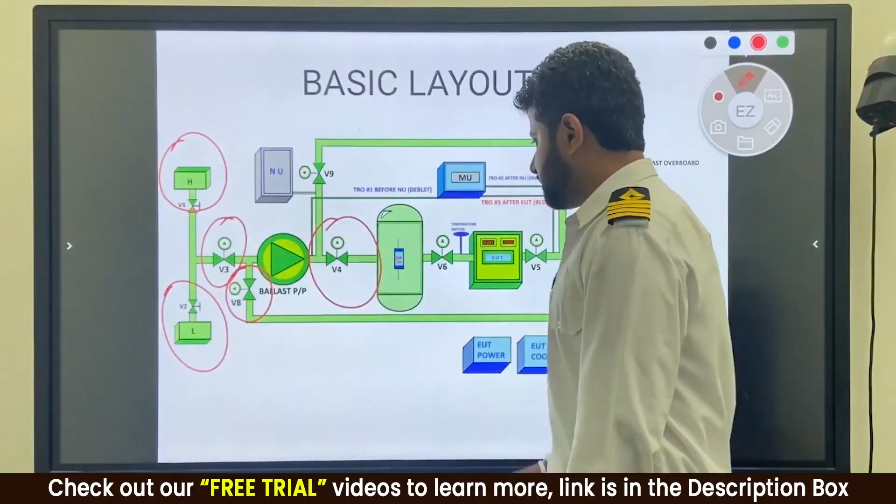So this is your high sea chest and low sea chest, copied from where the pump is taking suction. These are your three valves: V3, V8, V4. Can you see these valves? These are all pneumatically operated valves.

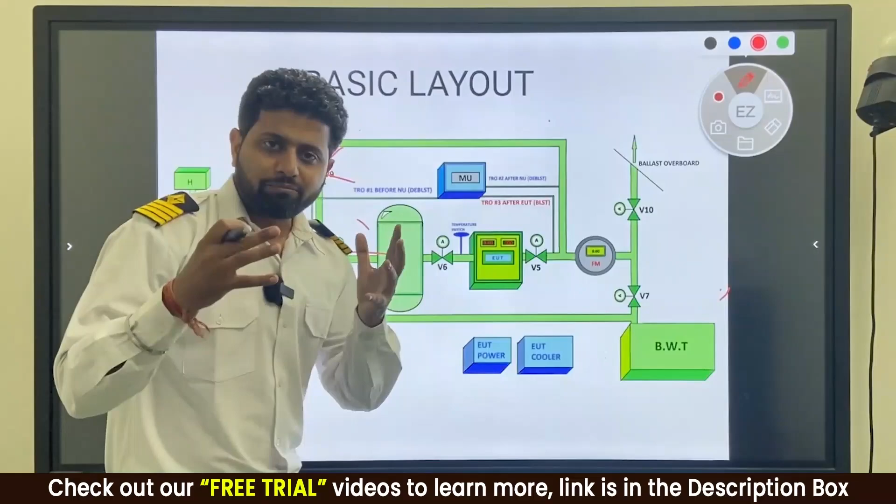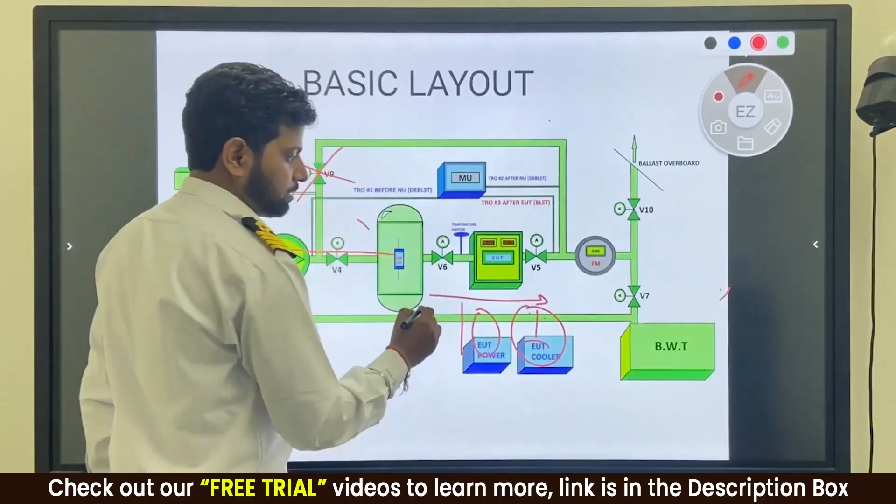Okay, let's move ahead. Now let me show you what this monitoring unit is and how it works. So what happens is, through this ballast pump, microorganisms are trying to go into the ballast water treatment system, right?

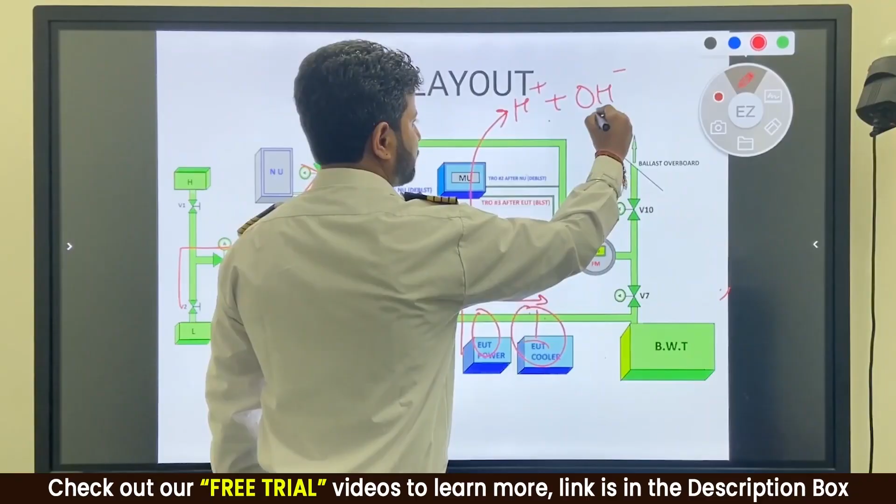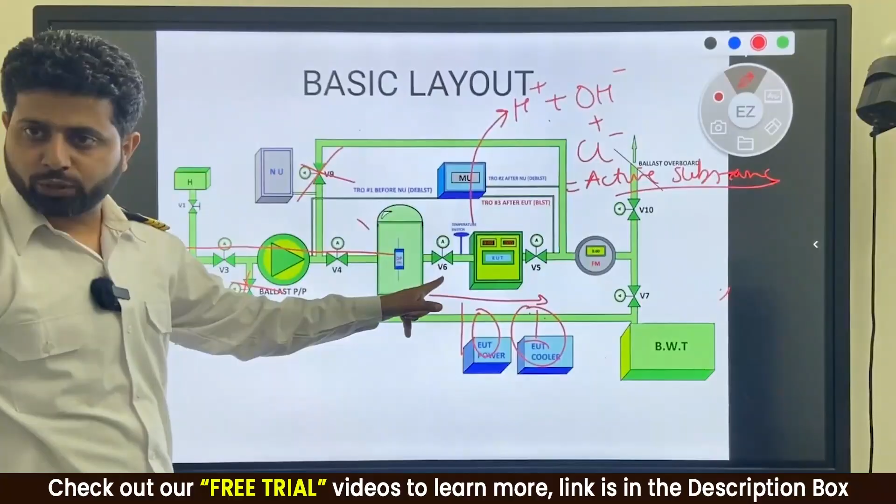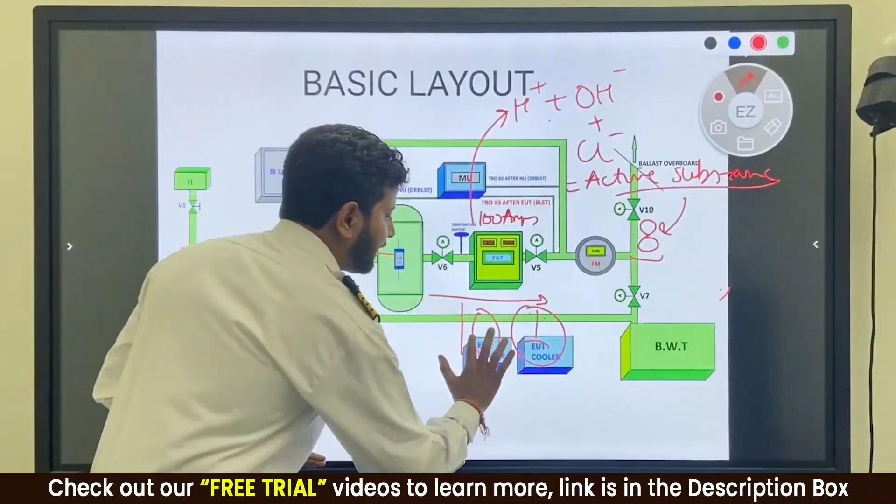Say the current flowing is 100 amps, and because of this current, say 8 active substances are formed. Then these 8 active substances kill 8 organisms over here. That means 2 are still remaining and they go into the tank.

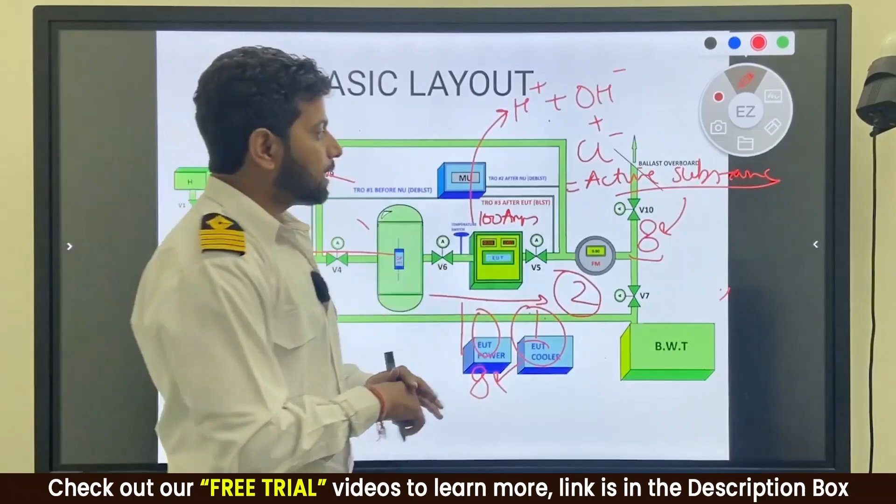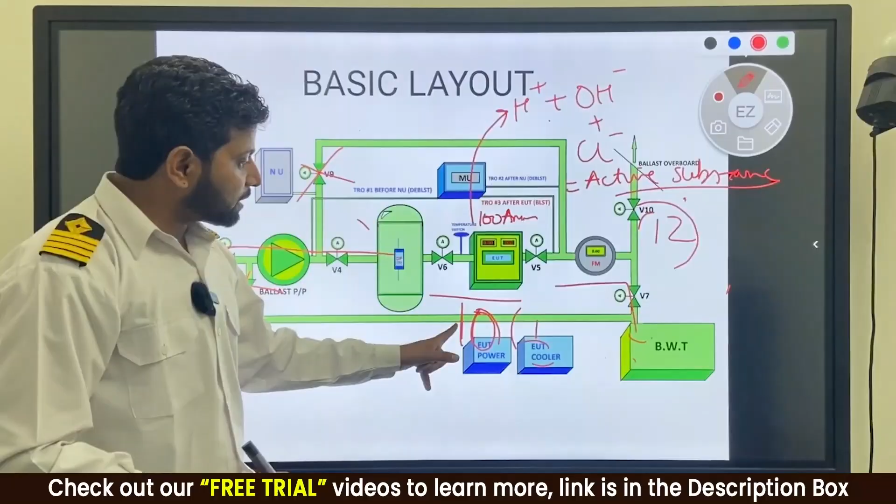But what if I give more current and produce 12 active substances? These 12 kill these 10, and still there are 2 remaining active substances which are going into the ballast water treatment system. So after killing all the organisms, still there are 2 active substances going into the ballast water treatment system.

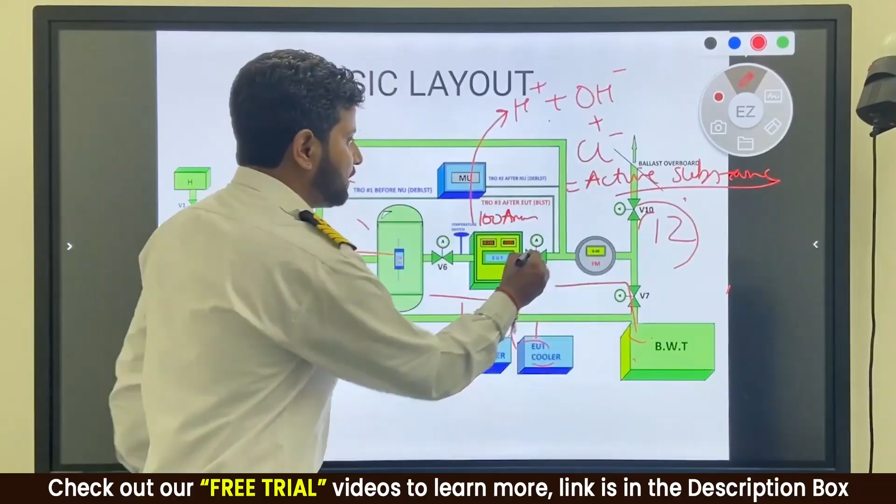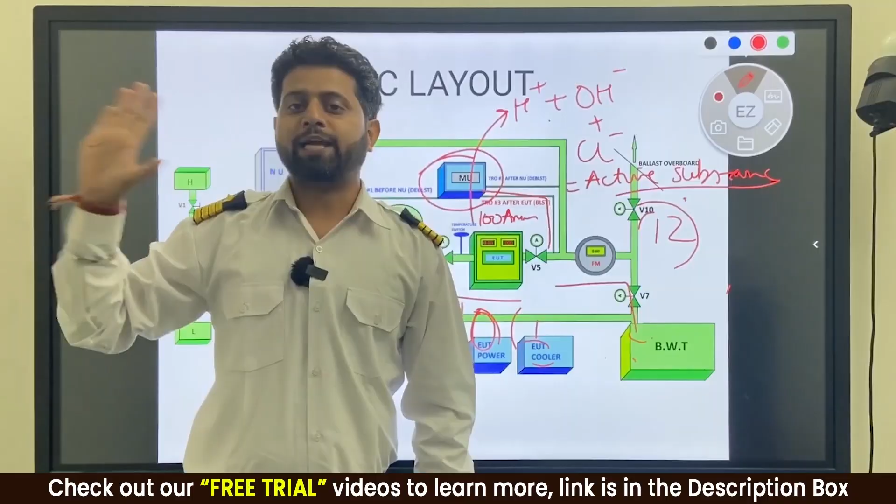Copied? Now this active oxidant we are measuring over here in the monitoring unit, to see how much is there. If it is more, that means it has killed all the active organisms, only then it is there. But it should not be more, because then it causes adverse effects on the paint of the ballast water tank. So normally in ballast water treatment system, the active substances measured here should be between 1.5 to 2.5 ppm.

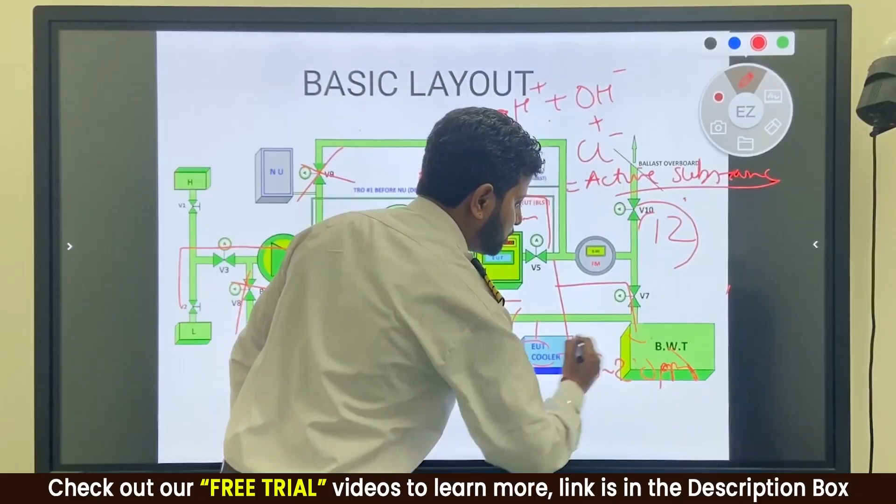I'll show you in the next slide in a proper way what is happening. So now let us see the ballasting operation.

So now these lines are vacant. As soon as you start the ballasting operation, this valve opens, this valve opens, this valve opens, this valve opens, this valve opens, this valve closes, this valve closes, this valve closes, and your ballast pump starts. This valve we have opened down below in the engine room.

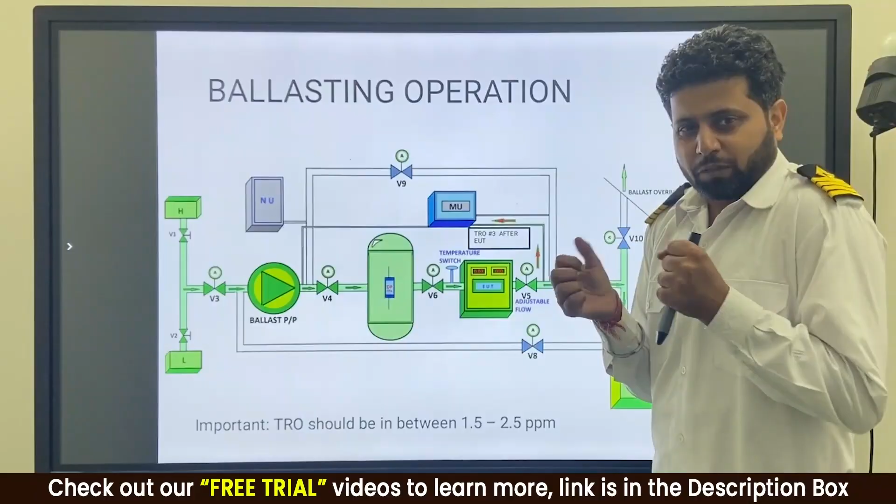Ballast pump takes suction over here. From here it goes into the filter, 50 micron filter. Most of the dirt is lost. Then it goes into the EUT. From here EUT, from the flow meter, it is going into the ballast water treatment system.

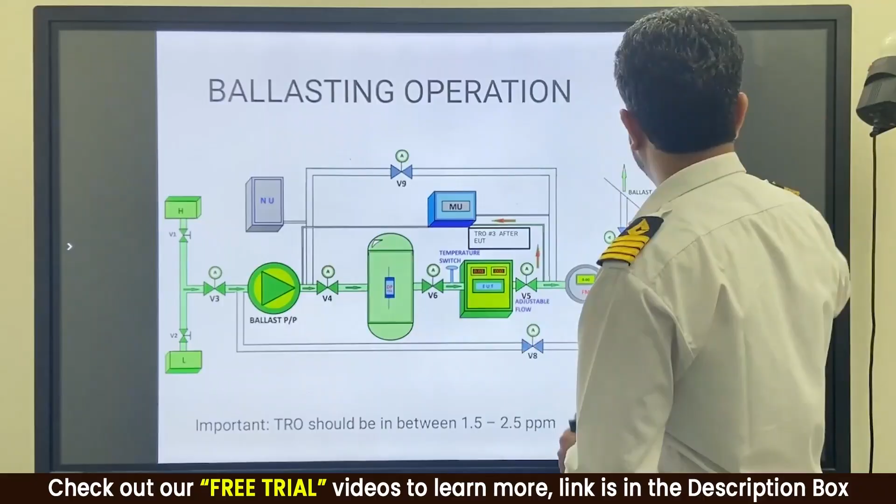From over here at the EUT we are giving current. There is current and voltage, and current is being produced, right? So here we give voltage and current is being produced. We can see the voltage and current over here.

Copied. And then we see after killing all the organisms, the active oxidants that we should see over here should be between 1.5 to 2.5 ppm. This means the active substance being formed over here has killed all the bacteria and pathogens, and still a little bit is remaining, and that is how we are satisfied. So it should be between 1.5 to 2.5 ppm.

What if suppose it becomes 5 ppm? It says, this is 5 ppm, that means active substances formed are more. Even after killing all the bacteria and pathogens, still more is remaining. It will say, reduce the voltage, reduce the voltage, we want to give less current. We do not want to form more H plus ions and OH ions that react with chloride ions and form active substances, no, not needed.

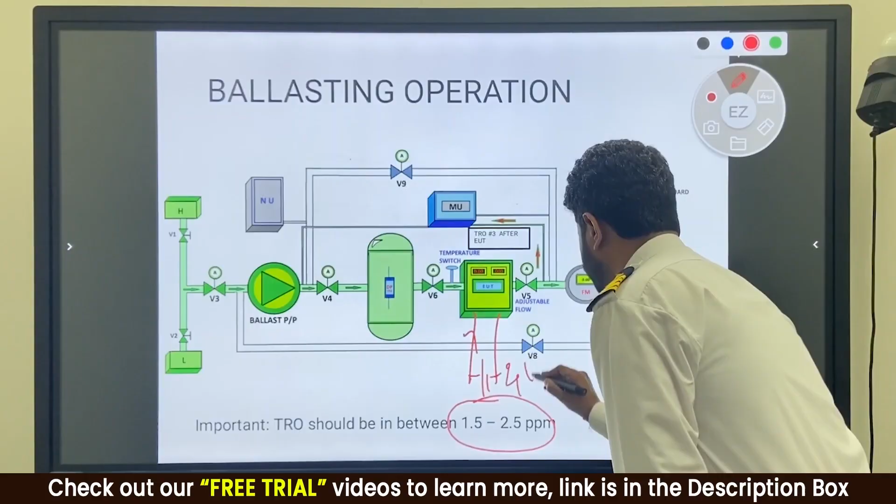And suddenly you will see, earlier the voltage was say 440 volts, it becomes 410 volts. Automatically the current reduces from 100 to 80 amps. When the current reduces from 100 to 80 amps, suddenly slowly you will see, okay, now the active substances are not 5 ppm, they have become 3 ppm.

So it says, "Arey, still it is 3 ppm, make it 2.5 ppm, reduce voltage a little bit more, make it 400 volts." So that current becomes 75 amps, and that is how this is measuring. Copied? I will show you in detail what kind of automation is happening over here, but there is a big control box where everything is going.

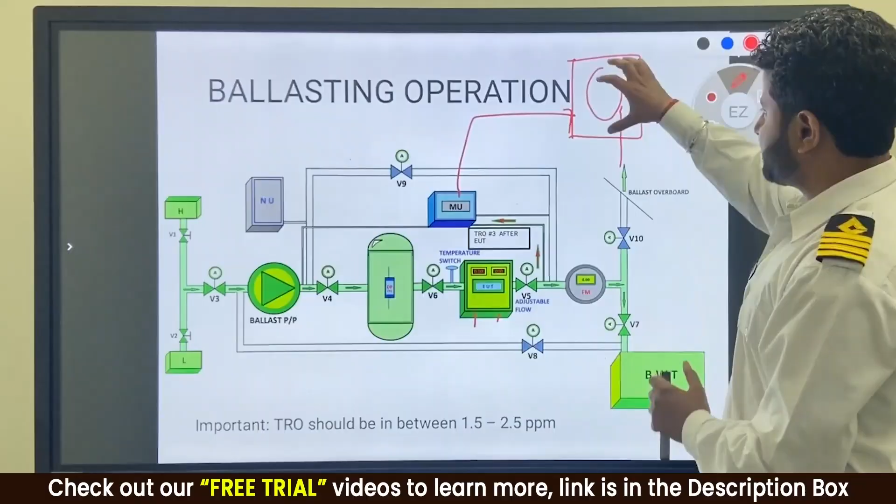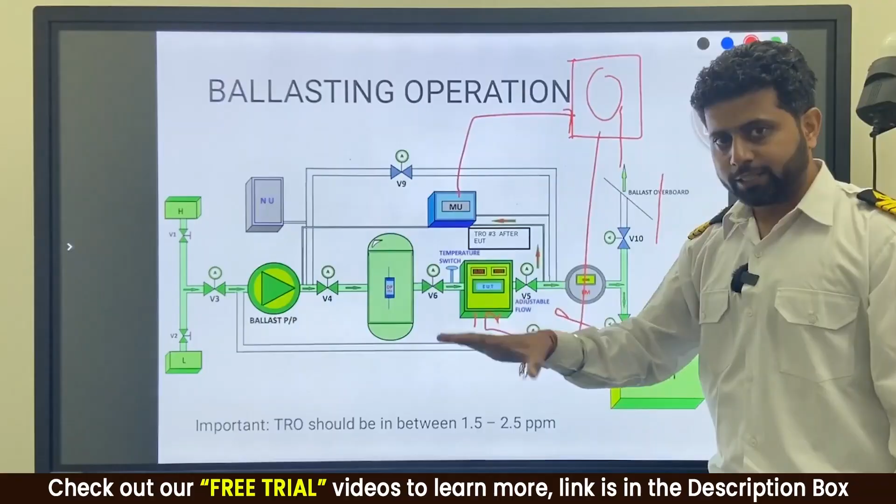So when this is measuring over here, this is sending a signal: bhaiya, you have told inside this control box, the memory of this whole system, that you want to maintain 1.5 to 2.5 ppm, right? But right now this is 5 ppm. I will tell EUT to reduce the voltage, to reduce the current, and then accordingly the active oxidants formed will reduce

even after killing the active organisms. Similarly, one day you see, arey, TRO is forming 0.5 ppm only, but I have said to give 1.5 to 2.5 ppm. Tell EUT to increase the voltage, and EUT starts increasing the voltage automatically. If voltage increases, current increases, more active oxidants are formed and they kill more bacteria, and active oxidants increase to 1.5 to 2.5 ppm, and that is how

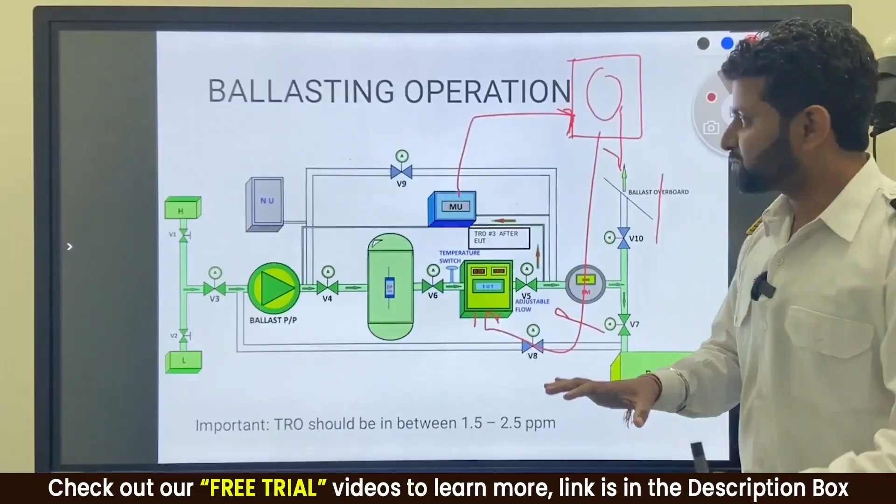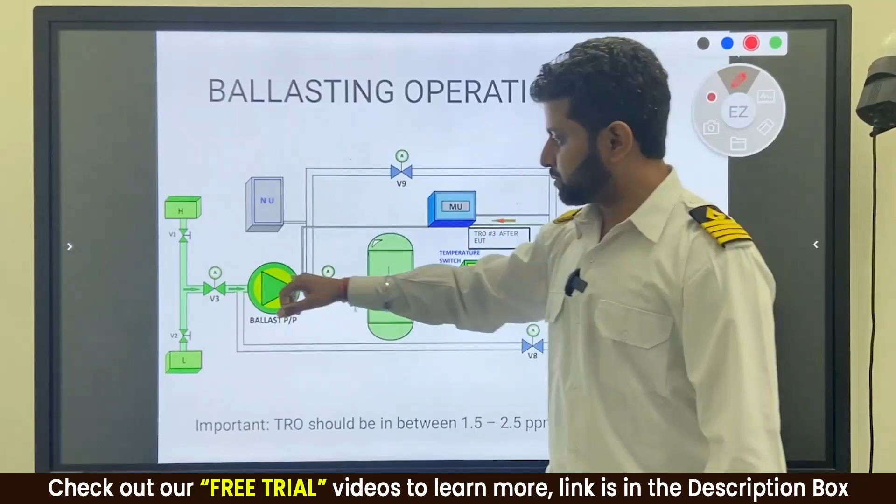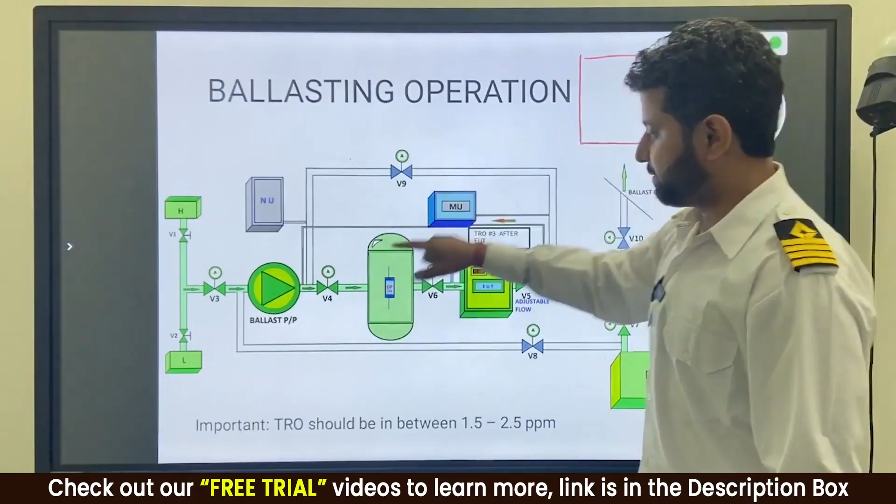this system works. So now in automation, say a chief officer starts the ballasting operation, first the ballast pump starts, then the discharge valve opens. Why? In a centrifugal pump you do not start the pump with the discharge valve open, and all this is taken care of by the memory box. When I press the start button, ballasting starts, it will open this valve, keep this valve shut, slowly open these valves, and the ballast pump will be started.

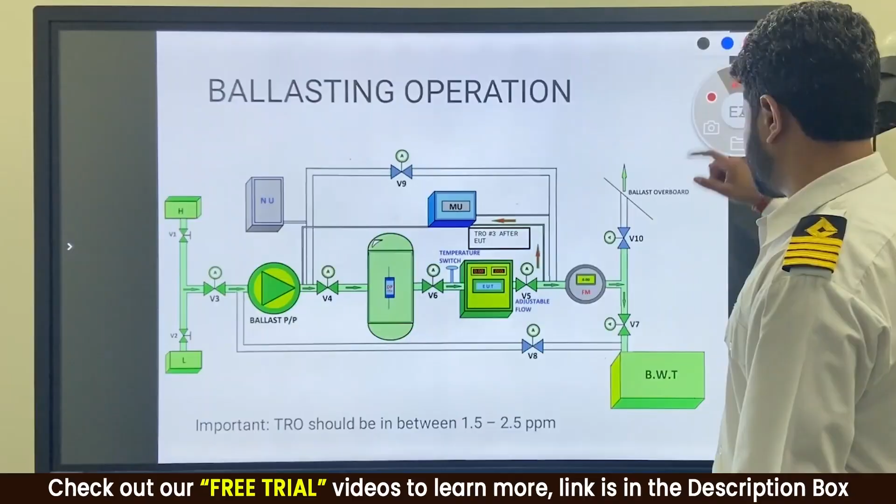Once it gets a signal that the ballast pump has started, amperage has come, there is pressure over here, then it will open this valve, then this valve, and accordingly everything is automated. This is how automation works. Copied, guys? So I hope you have understood this. Abhi aage badhte, and I'll show you later what else is there.

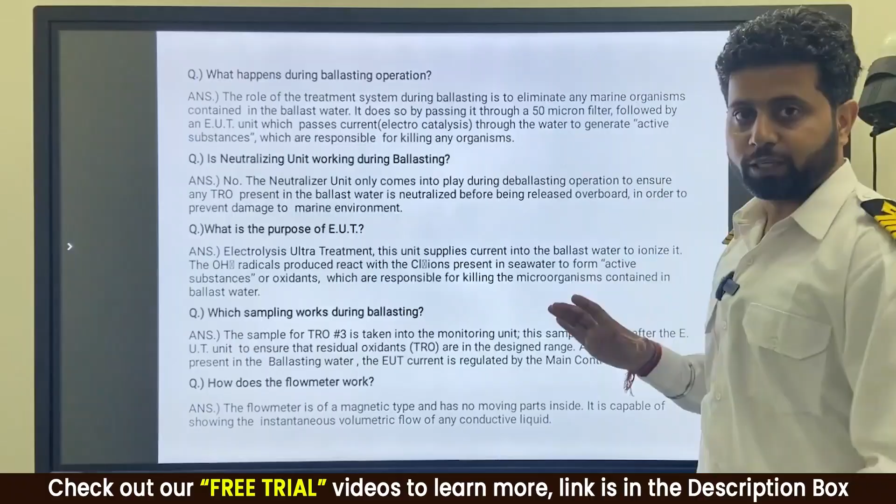Now I have to talk about the auto backwash filter, but before that an important FAQ. What happens during ballasting operation? The role of the treatment system during ballasting is to eliminate any marine organisms contained in the ballast water. It does so by passing it through a 50 micron filter. Can you see this big filter?

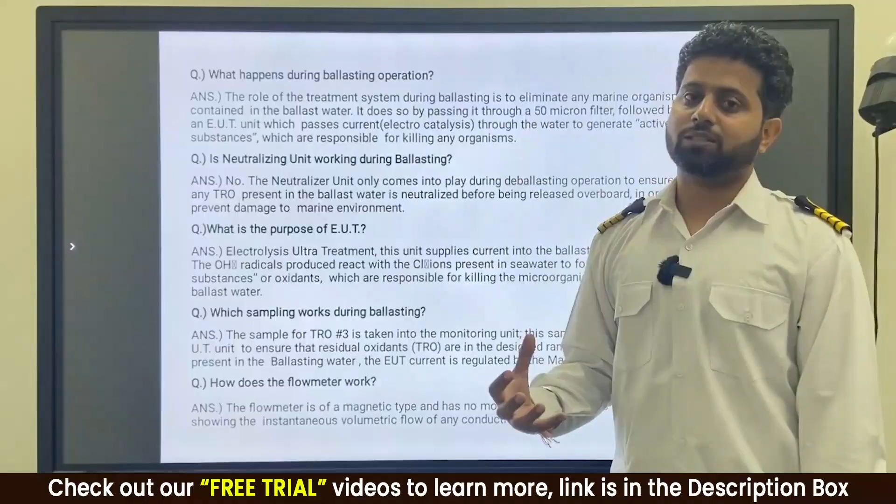This is a 50 micron filter with a mesh size of 50 × 10^-6 meters. So a 50 micron filter followed by an EUT unit which passes current, electrocatalysis, through the water to generate active substances responsible for killing any organism. Copied? Does the neutralizing unit work during ballasting? No. What is the neutralizing unit? I will discuss it later with the deballasting system, where you'll understand why it is required.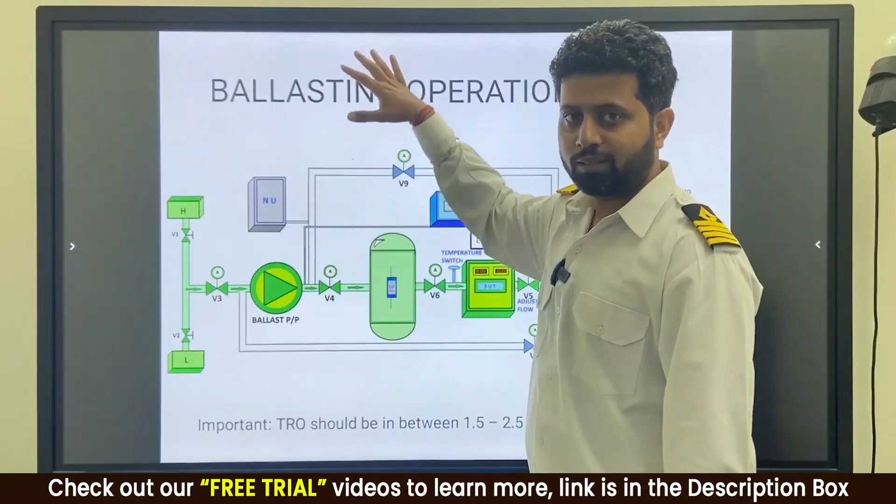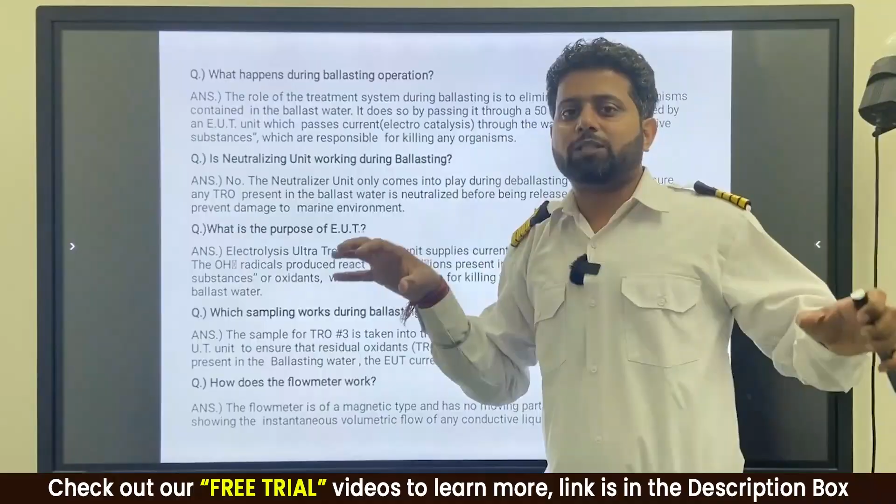Since the neutralizing unit is not required, there is no water going into it, no water in this line, so this valve is shut. Copied? And all this is happening in the MCP. Click ballasting operation and only the valves required for ballasting open. Click deballasting, and only those valves required for deballasting open.

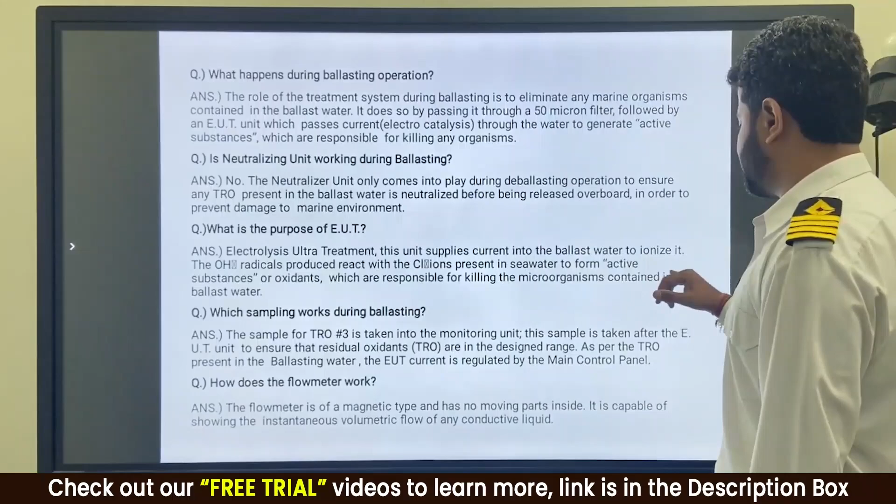What is the purpose of EUT? EUT is electrolysis ultra treatment. This unit supplies current into the ballast water to ionize it. The OH- radicals produced react with chloride ions present in the seawater to form active substances or oxidants which are responsible for killing the microorganisms in the ballast water. I have discussed that in a very good way.

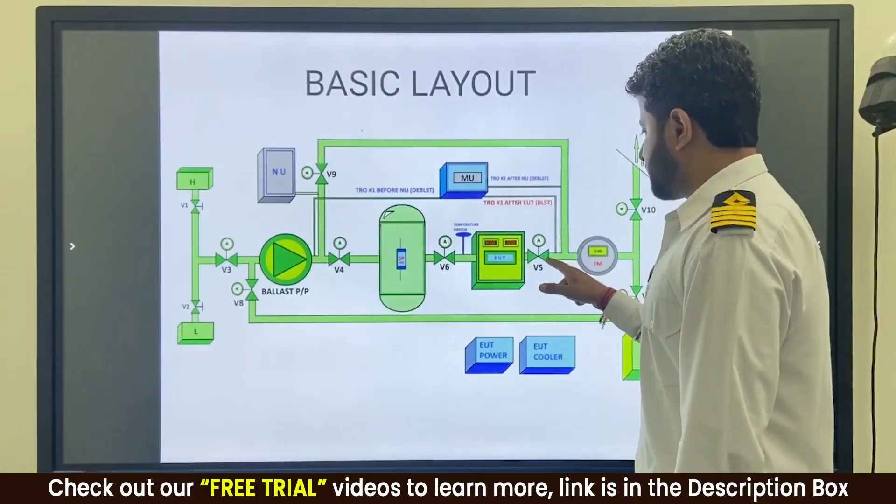Which sampling works during ballasting? Here you see there are 3 sampling points for the MU unit: one from here, one from here, and one from here. For ballasting we use only this one, and for deballasting these two. So for ballasting we use only TRO3, which tells us you have killed all the organisms and still have active substances in minimum quantity, 1.5 to 2.5 ppm.

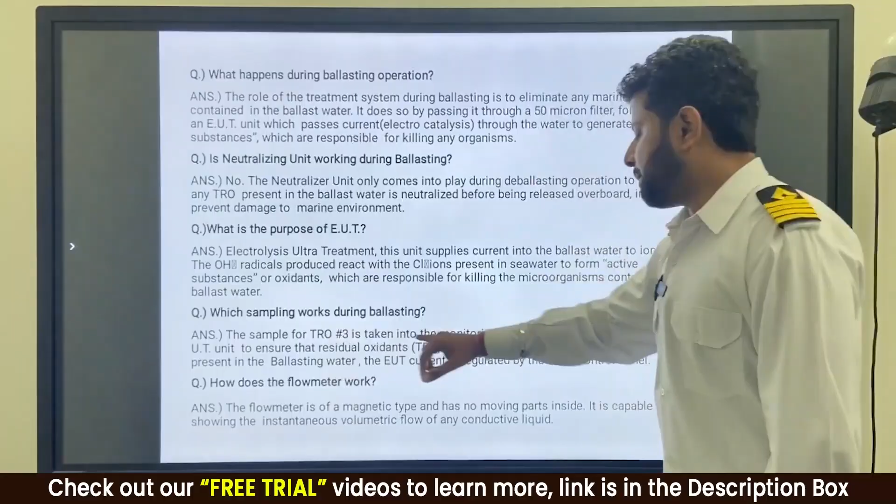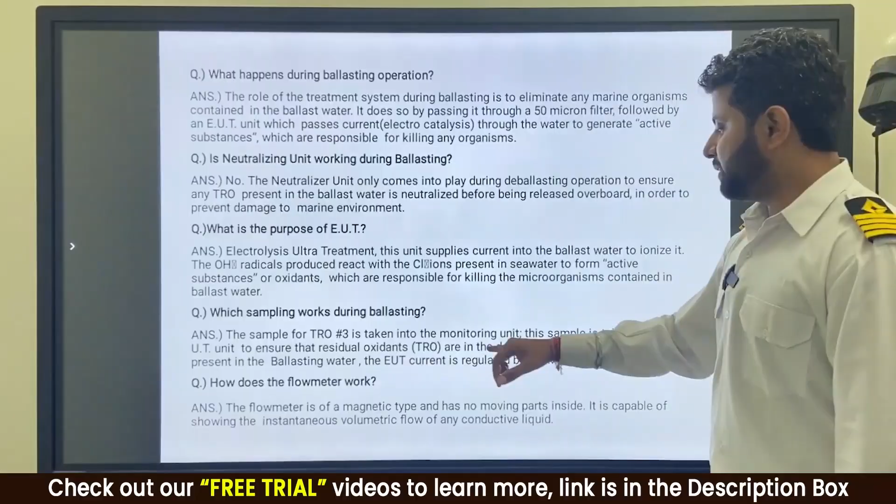The TRO3 sample is taken into the monitoring unit after the EUT unit to ensure residual oxidants are in the design range. The EUT current is regulated by the main control panel, the MCP, as per the TRO, meaning the oxidant present in the ballasting water.

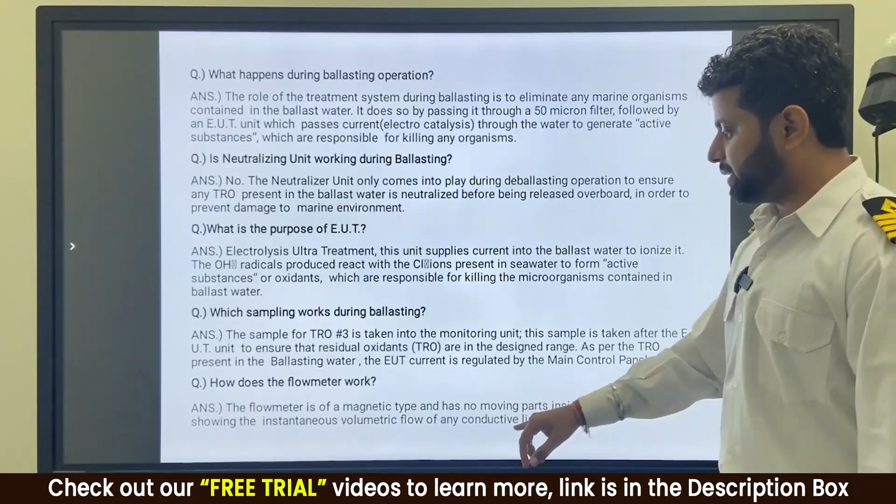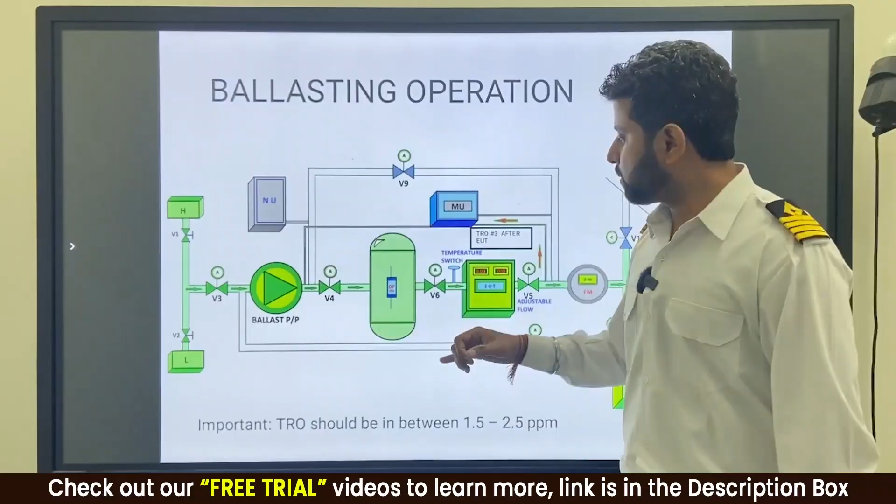How does the flow meter work? The flow meter is magnetic type with no moving parts inside. It shows the instantaneous volumetric flow of any conductive liquid, and since this is seawater, a conductive liquid, it measures it. Now that you have understood the ballasting operation, in the next video we will talk about how the automation of this filter works, which is very important. Copied? Jai Hind.